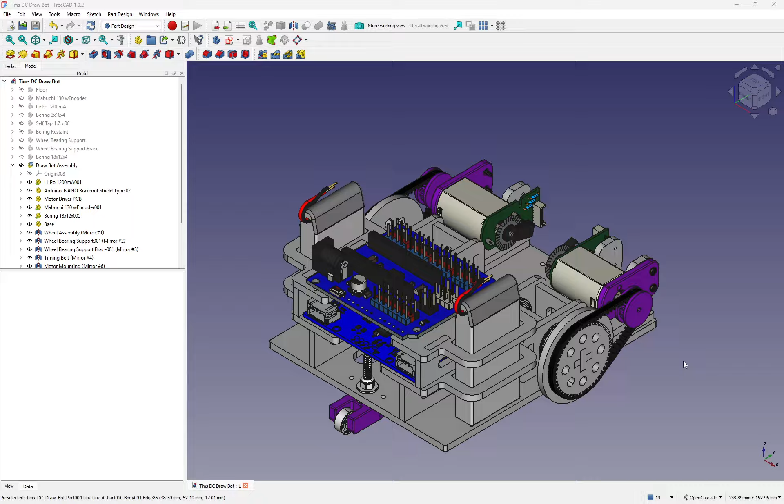Hello everyone, this is my little draw bot. I haven't drawn the pen lifter yet. I'm going to make a lifter, but I'll put some holes here ready for screwing something I'll make out of.

I'm going to sort of 3D print something to go in here to hold the pen and move it up and down. Like most my jobs, what I'll do is I'll put a few more holes in this base plate so things can be screwed to it or added later on. A few extra holes doesn't harm it.

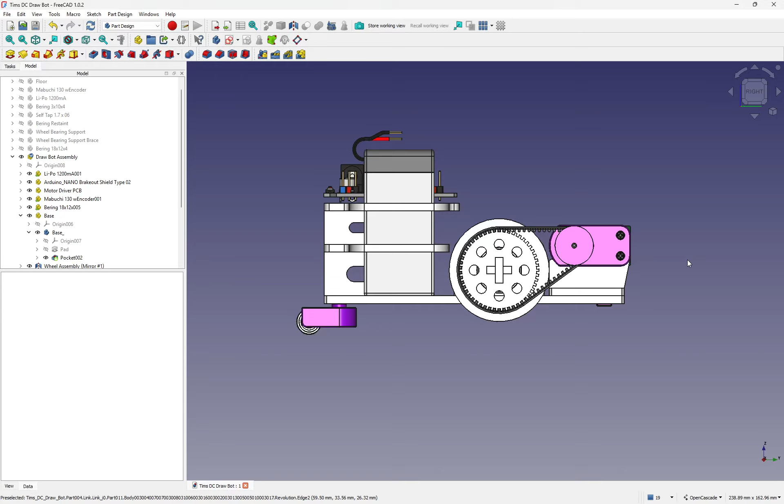Right, so I've drawn it and I'm making this video to talk about drawing a timing belt. If we look at this timing belt, we can see that it has to fit into slots on both sides evenly. Now, if both these timing drives were the same size, it's easy because you just make sure you go within 2 mil, you can go in 2 mil steps and add another one and just make sure the slot stays in and it'll be the same top and bottom.

But the thing is, I'm putting a smaller gear on here, so in real life you'd just add this and then you'd have this on a slide, which I've just done. Make it simple, I've just put a slide here which you can clamp and it'll move to wherever it fits. But the thing is, when you're drawing it, you want to be in the right ballpark so that it's going to fit. You don't have to put a real massive slider for it to clamp and make it work. So yeah, I thought I'd do that.

So now I've done this and I've made a cock up as usual. I drew my little jockey wheel last. What I'm using here is a bearing, so it swivels around the bearing, and another bearing here that it'll sit on and roll. So basically this will turn into whatever direction we're going.

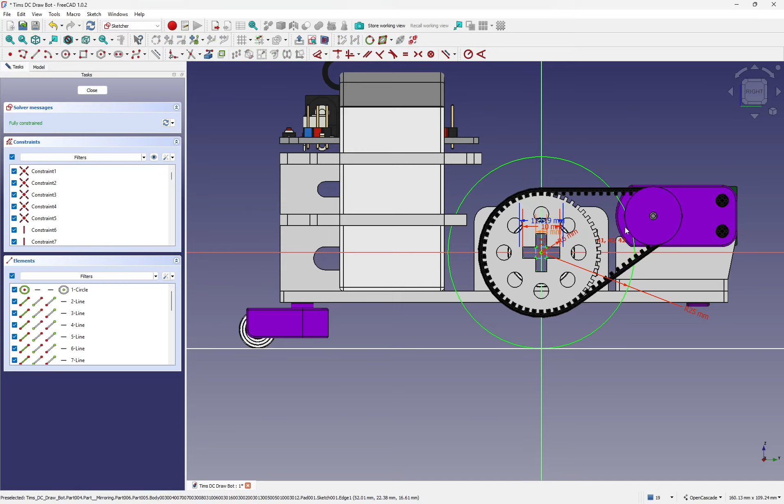So delete that, and we'll just bring that down to the floor. And so what radius have we got there? 24, well it's 25 mil, that. There we go, 25 mil. And you can see I'm clashing now with this, so I'm going to have to move all that out that way. And I'm clashing with this here now. Now, I'm not clashing with the top bit. I could leave that where it is, but I'm going to have to move this battery back.

So let's start with that then, shall we? Let's do our mods. And what I want to do is move the back. What I'll do is move them right to the back here. Let's start with this top panel. This one. Yep, this one here. So what I'm going to do is get rid of all that. Get rid of that one.

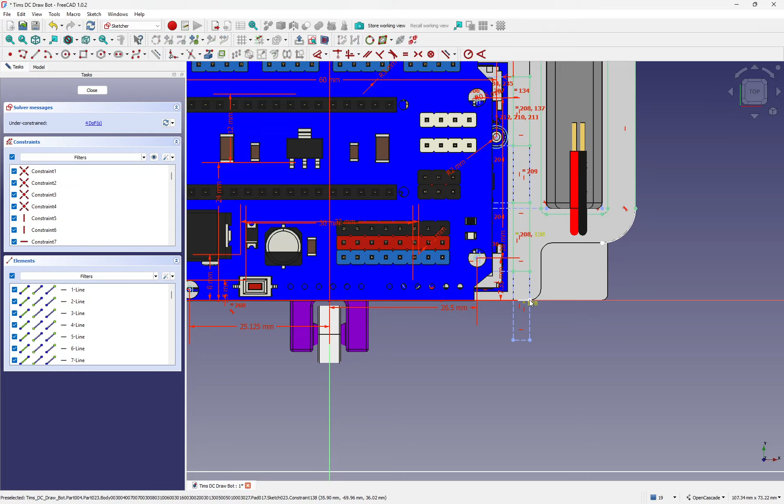Right, now notice I've got a dimension on that one, so I'm going to have to replace that sometime. So let's just bring that across. So, no, let's fix that. And I've got it fixed on there. Or is it fixed at the other side? Let's find out. Rid of those. Now is it fixed? No, so that's not fixed anymore, and I can bring that.

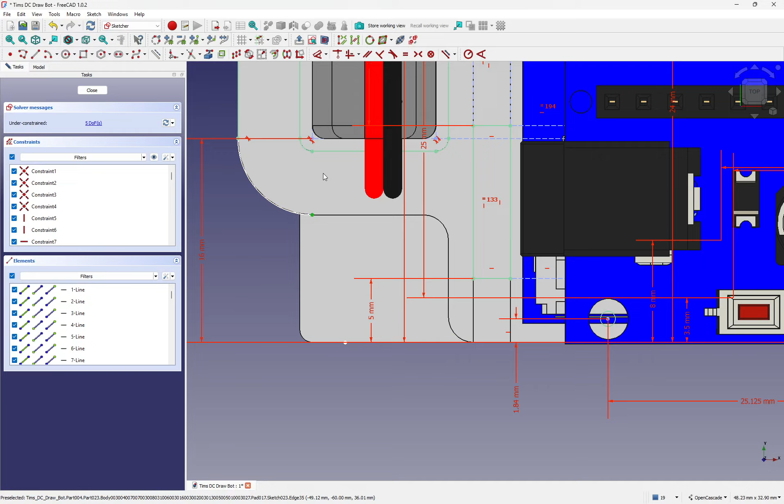What I can't do, what I need to do is release this. So this is tied in somewhere, probably by this here. So I'm just going to get rid of those as well, and get rid of those on this side as well.

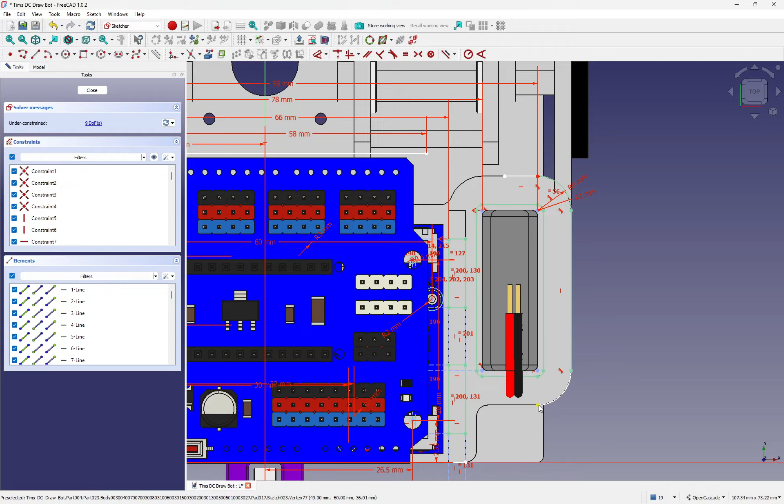And that's not tied anymore. This is tied still - yeah it is. This is tied, oh there we go. Got that there, tied it somehow. How is that going to the other side?

Anyway, let's have a look in there. Let's just make it wireframe. And what I'll do, no, I think what I'll do is we'll get rid of the actual panels. Right, so let's just get rid of the nano board for now.

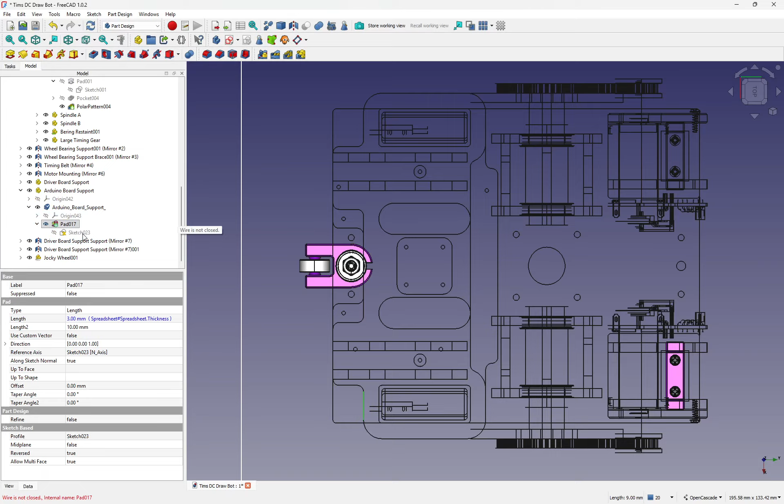Where was I? That's, yeah, that's fixed that way. So what we're going to do is going to make that. No, actually that wants to move down. I should have left some others in there, but yeah, that is going to go across.

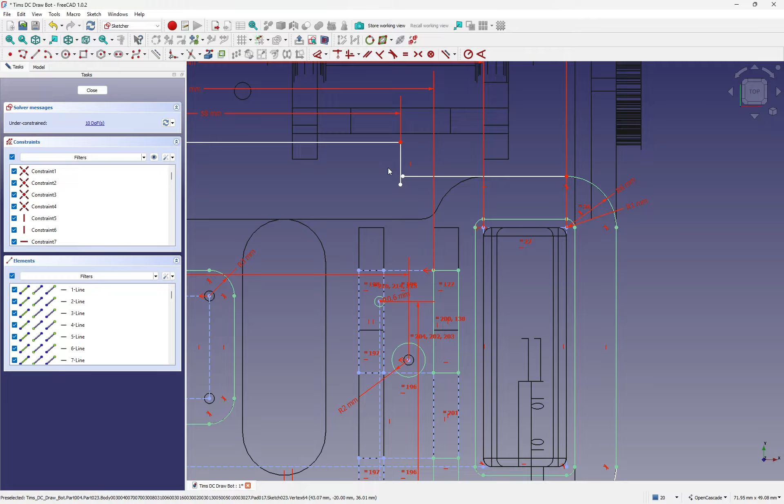Yeah, that's going to go across there. So, in fact, what was that? What did they have there? Yeah. So, leave that.

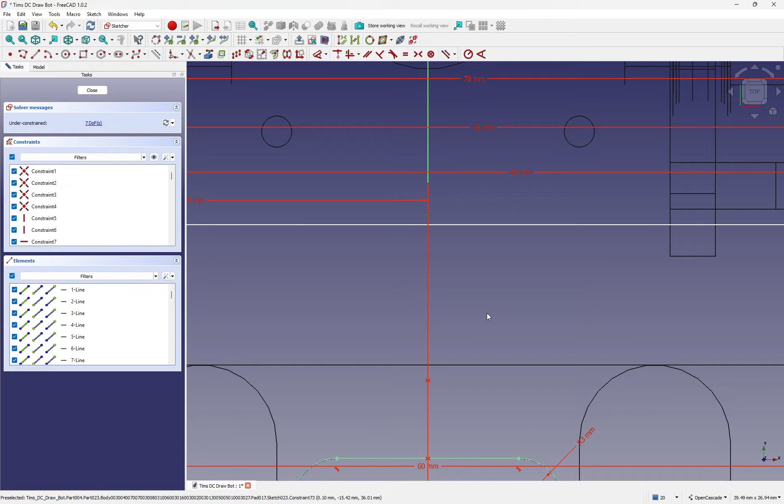There it goes. Right, what I'm going to do is I'm going to keep that central. Right, so that is fixed. What's fixing this? We've got that going across there.

That's only fixed to this. Oh, it's this one here. Look, there we go, I've got that one fixed there. So now that should actually move. It says it should move. Oh, it moves the top one. Oh, right, okay, do that.

Right, that's fixing that top there and that top there. So what I want to do is I just want to delete that one. And I want to keep that the same length. Yeah, so we'll have that there, and I'll just delete this one. So now the whole thing should just move down there like that. So that's what I'm trying to connect them two together.

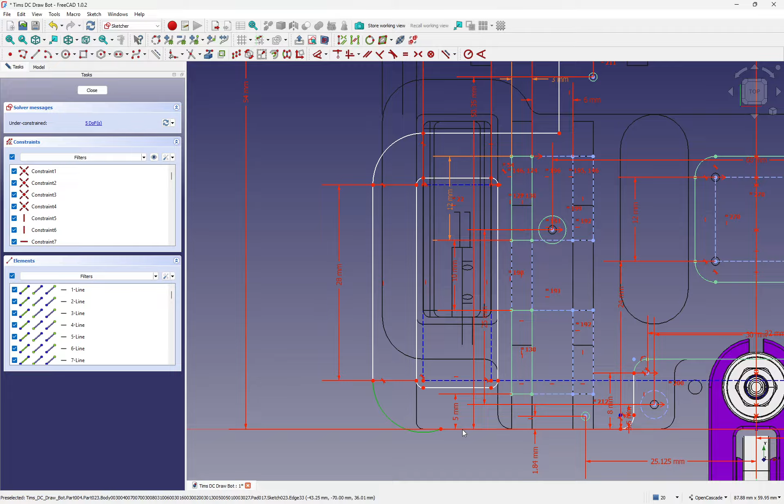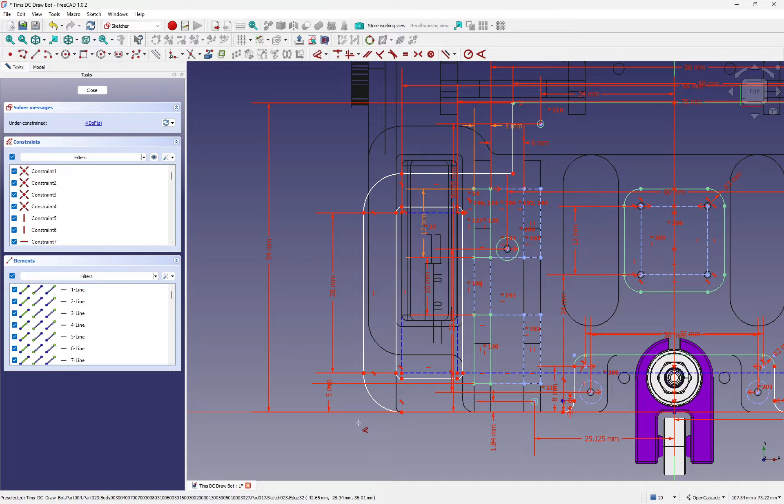Line up. See what that one is. That's that. Or is it this one here? Right, wait a minute, I wish they'd go behind the actual sketch. What else is in front of the sketch now? Oh, that one, there we go.

Oh, actually, I've done it. I thought I hadn't done it. The computer must have been a bit slow there. Right, so connect them, and let's just make them tangent.

How's that come? Oh, what's up with my computer? It's gone slow. Right, so I've moved my batteries down and we've got these down now. So for some reason these, oh right, yeah, it was this. So that, I don't know the radius. So I've got a 2 mil there. So that's, yeah, there we go. It's all fixed now. And what I'll do is I'll put some radiuses in here again.

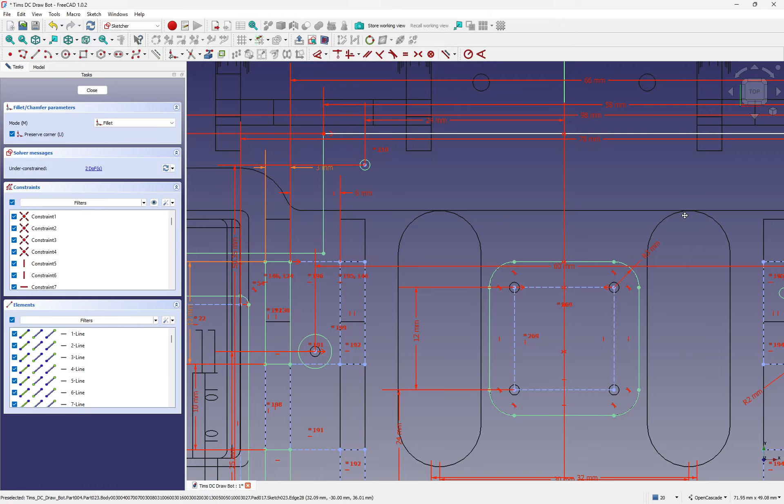I deleted something I shouldn't really need it to. So, yeah. Right, so that and that. Well, let's do it on this side. That and that equal to that one. So that's got that and that.

The thing is, oh yeah, I want to make this central. So if I go like that and that, that'll line them up eventually. We do that one. And do the same here.

There we go, we're all back together again. So that one should now, that one should look okay. And there we go, so I'll move that one back. And so we can move our batteries there now.

Where's my battery? There's my battery one. And this one. So my batteries are going to sit there now. So we need to alter this bottom one as well now.

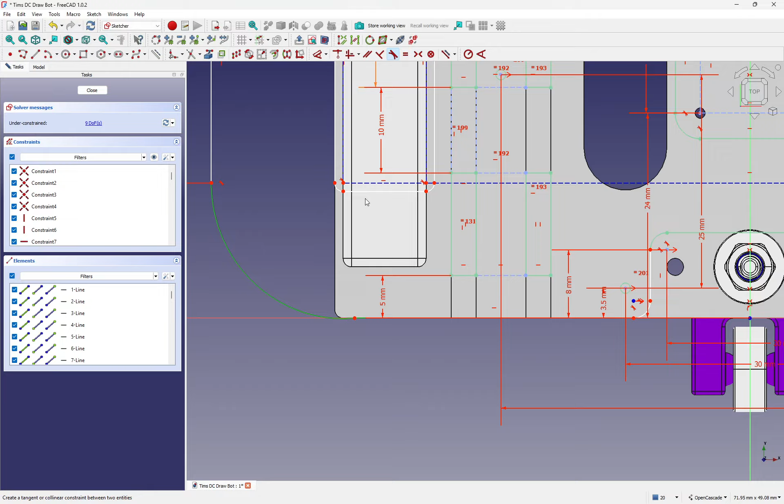Okay. And these ones. And that's going to allow me to put that one. That can bring that down to there. And just make sure that is tangent. Yeah, it's done it. Right, so why is this?

Stuck in, nothing stuck in that. Right, oh, that one's going to need moving up. Is that attached to it? It is. What have I got it attached to? That, I think. Yeah, go back up there.

Right, where's the other one? Just go wireframe again. And just zoom out a touch. Where's the other one? Actually, is it going to be above that? I don't know, we'll find out.

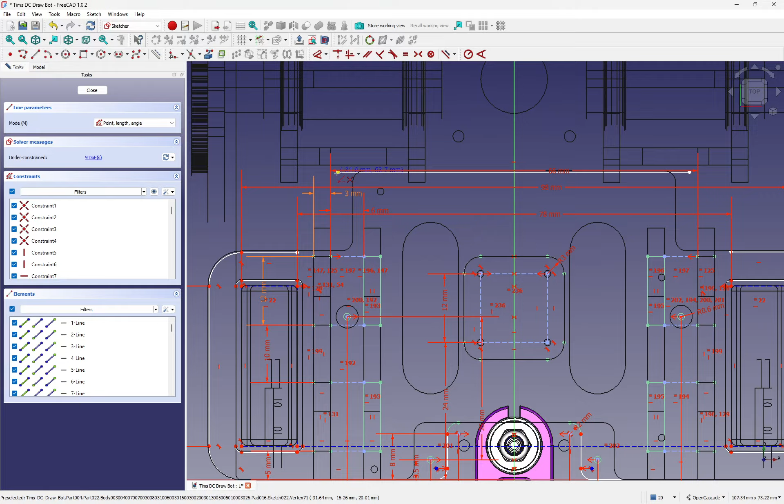Put some rounded corners in there.

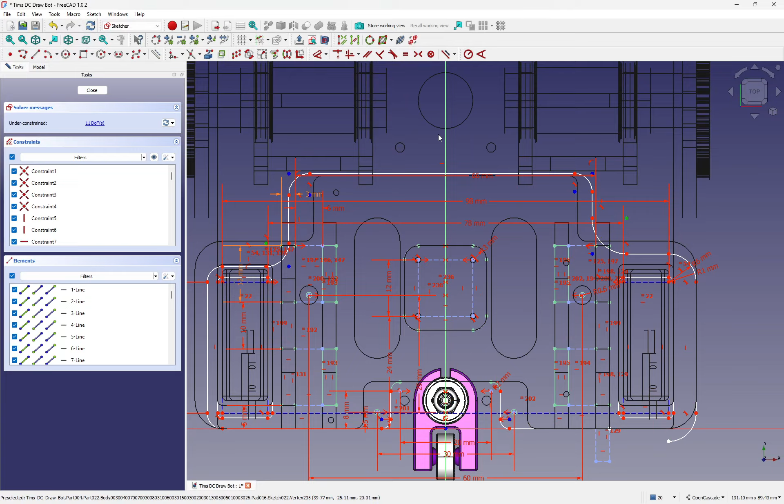Straighten those up. Centralize those. And we'll centralize. And this one is going to be same as this one.

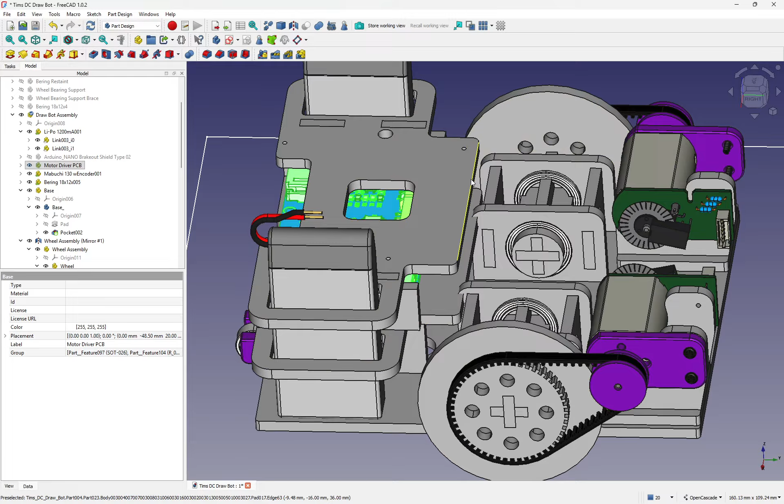So this will want shortening. In fact, actually, I need that one for the Arduino. The Arduino screws there, so that goes. But there's nothing on this, so we'll have to get that all the way back.

And now I can either shorten that. I've got too much edge. What I'll do is I'll just make that longer there on both of them. So let's just do the top one.

Yeah, yeah, I reckon I need to move it up there. So that means I need to just get rid of that. Free that up, that moves now. Yeah, that moves us back together again.

Okay, and then that one there, we will just put a... Do I need to put construction? Right, oh I know, let's see what it's at. Yeah, I need to, I'll just disintegrate.

All right, these here. Yeah, so I'll get rid of them. So what I need to do is back up and get the others back together again.

There we go, that can go up there. So what we'll do, construction line in, keep that in line with that.

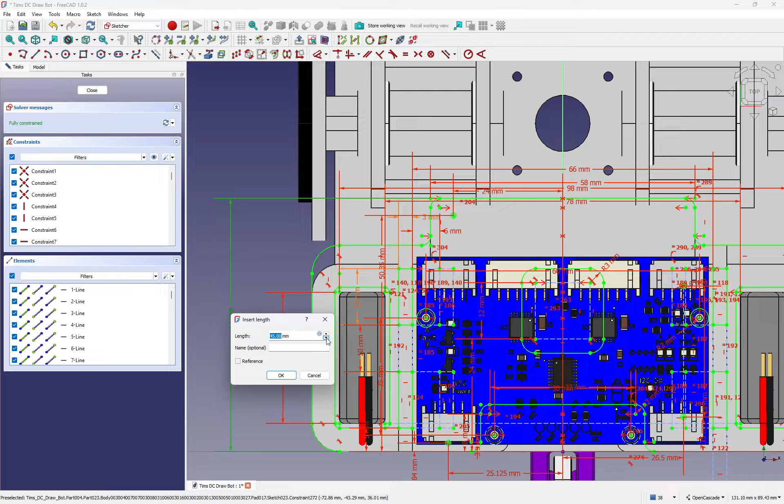Let's just reduce that by that. Can we? No, hang on, right, let's just go. Oh, what's that hole there for?

Oh, hang on, which one am I doing? I'm doing the Arduino one. Yeah, that one has to steal it. So, right, I need to do something similar at the bottom.

It's just like I like symmetry. And plus, I need this, make it too weak if I didn't. So let's do this one now.

And this one needs that one bringing back. So that's this one. Yeah, so that one should go back. Oh, let's do the others first.

Right, so one is, oh right, yeah, I know. Right, I just need to pick the right center point here. This one up. Which one is it?

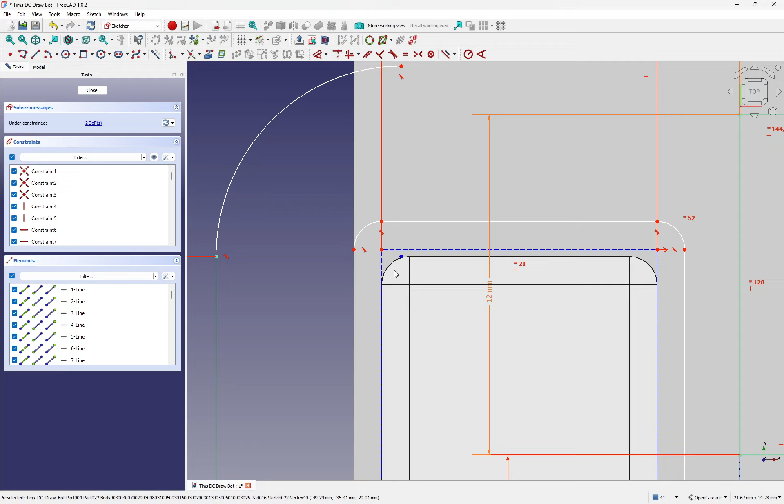Oh right, that's that one. So it's got to be this one. So what I can do is I can put them three together. And that one's free now. Can't move it because I've got this one fixed here.

Now let's find out which one that one is. Oh, it's the one at the end of there. So yep, let's put that together. And let's just do the same again here.

So that should be, yeah, that one, hopefully. Oh yeah, that moves that one up. Right, so I need that one to go to about there. So we can set that in stone.

Let's just get a dimension across from there to there. Let's make 44, won't it? Yeah, let's set that, and then we can make that vertical.

Let's set them. In fact, well, hasn't it actually? It's never set out at all. So it's not changing. Oh, it's this here.

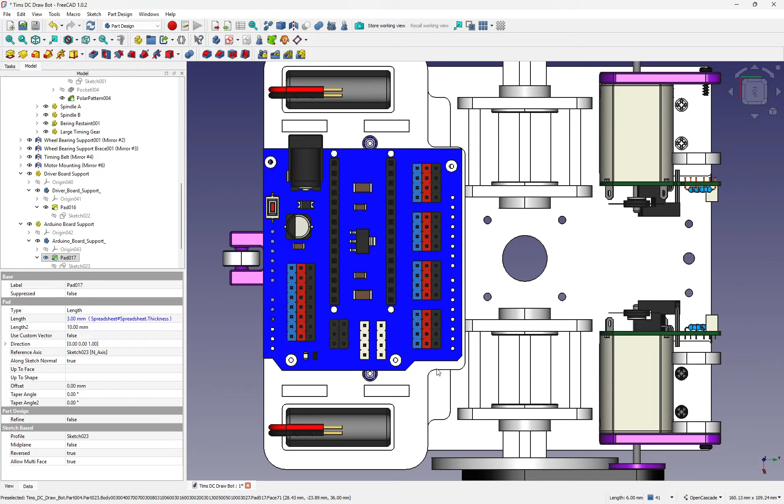I might make that a bit wider just so it's a bit... look at straight on top. Yeah, so that it would pass on this side, but we do it on there. Let's make it a bit wider. Use this one in.

Yeah, why have I got 58 now? Oh, because I'm on another one, I was measuring doing the other one. Yeah, right, see, there's 70.

Yeah, I'll make it the same as the other one. Maybe 80. Yeah. Or did I make it 90? Oh, I didn't. Must be measuring - oh, I'm measuring from here before.

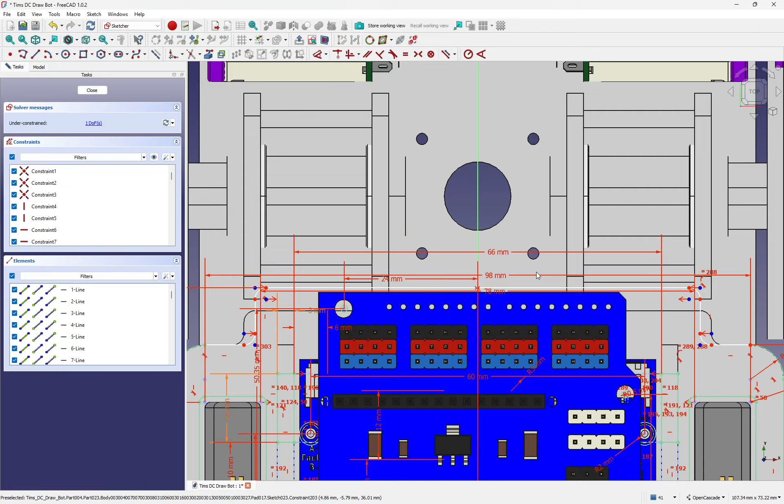Right, hang on, let's do it the same way. Measure from there. We'll put in 80. There we go.

Yeah, it's fine to me. Does that... you never know, I might want to mount some stuff on there. Maybe I put a hole in there. Anyways, that's holding them two boards.

So now what I need to do is we need to move this back. Now we're getting onto this timing belt, so let's have a look at our timing belt.

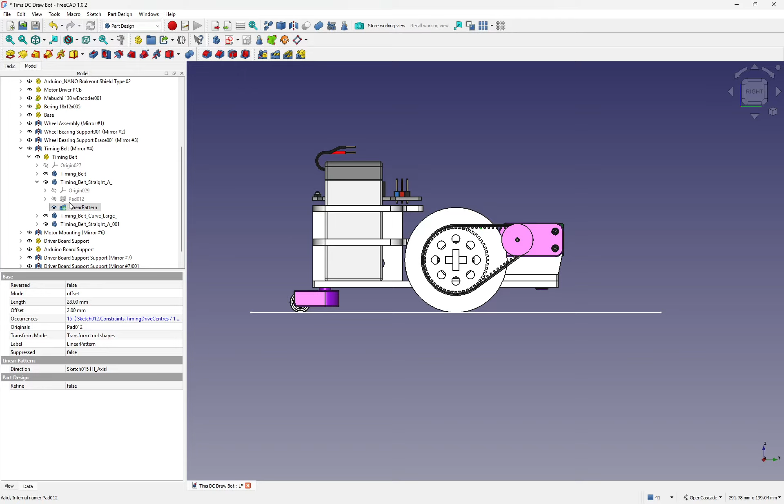So yeah, so if we look at this sketch here, I think it's this one. Yeah, that one there - oh no, it's not that one I want. Well, which one is it? Oh, time, I'll try this one. Try that sketch, there we go. We can see the sketch there.

Now, as before, I mentioned in some of the other videos it's good to use a spreadsheet, and put the spreadsheet in a separate file because sometimes it's better that way, if I'm going to start splitting up the model into separate components and use it more as an assembly. So I've actually put it in a separate file.

What's that? Yeah, I don't know what's wrong with my bloody PC.

Anyway, there's our spreadsheet. I've put in here some thickness of my tabs so that I can change the thickness of the material. I've got some new board actually, and it's more accurately 3 mil, so I'm going to have to put kerf in as well, deduct the kerf from my laser later, and then we'll check that it all fits.

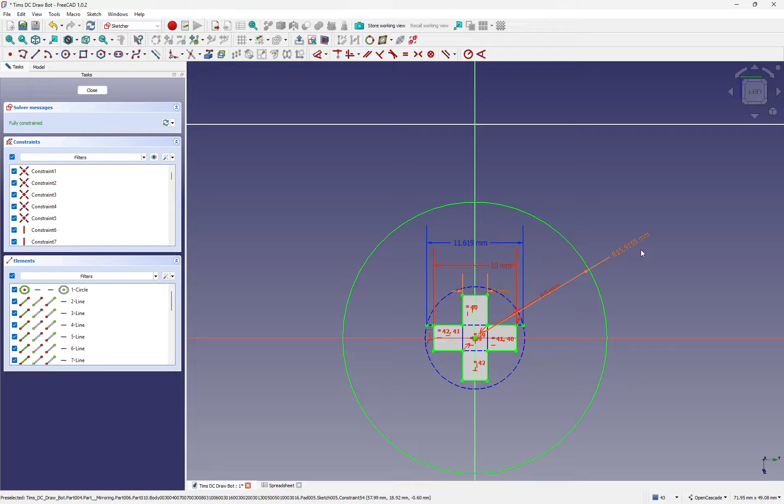So to do that, we just multiply our number of teeth by 2, divide by pi, and divide by 2 again. And that will give us a radius based on the number of teeth we want, because that's the number of teeth I've set in my spreadsheet. So we can see that, we'll go okay there. So we can see that it's not, like I say, a whole number. We've got a fraction of a number there to get all the teeth to fit.

So what happens is we close that. Just remember that's about 15.9. So if we close that and I go to my wheel here, I want to make it bigger. So at the moment in my spreadsheet, I've got 50 teeth. Well, let's give it 60. So we give it 60 teeth here on our large wheel, and let's have a look at it.

What I need to do is just go up here, fairly high in the tree. I'll probably go about here somewhere. As you can see, it's highlighting all that lot. And what I'll do is I'll just recompute. And it's got me a solid layer. Let's just go back to this sketch. That is 15.9.

Right, so now we're at 19. It should have recomputed when I asked it to recompute. But anyway, okay, so you can see that it's increased, and I've obviously done something wrong with my maths. We'll correct my maths. I think it's because it jumped too far, and I think what happened is that line there should have been over here. Let's just undo that, shall we?

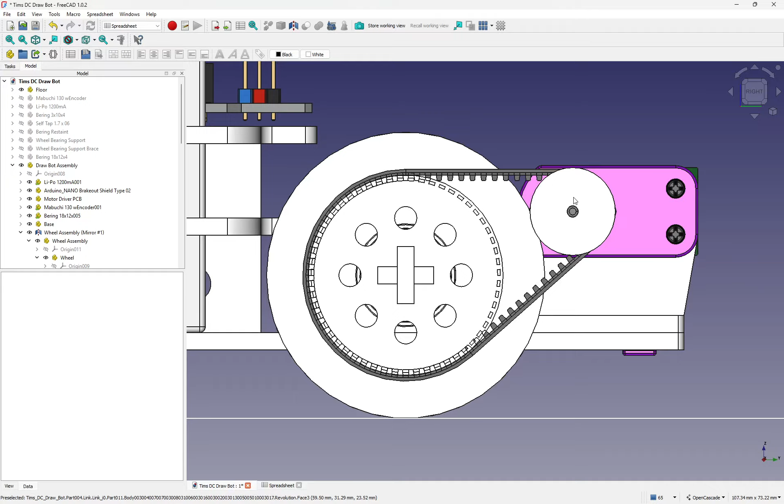This is because I'm using variables everywhere. So what I can also do is I can set this distance. If we go to belt again, that one I think it was, right, that one. You see this 30 mil here, I want to move this further out. But can you see that I've actually given it a variable name? This is timing drive centers. If I use this in my calculations for all the teeth and everything, then this is going to put everything in the right place. So at the moment, let's just turn that on. Let's turn, what else has it turned off?

Can you see where my motor is here? That's using this variable inside the timing drive centers, used to position this motor. So I want to move this out about another 10 millimeters.

Let's make that 40. Okay, that's going to go way out here. Actually, it's not that far. I reckon 35. 35 should do it.

So you can see here that I really want this here, and because I've used this variable, if I go to the motor again, there's that motor. Now if I go recompute, it's recomputed its position and put it in the right place.

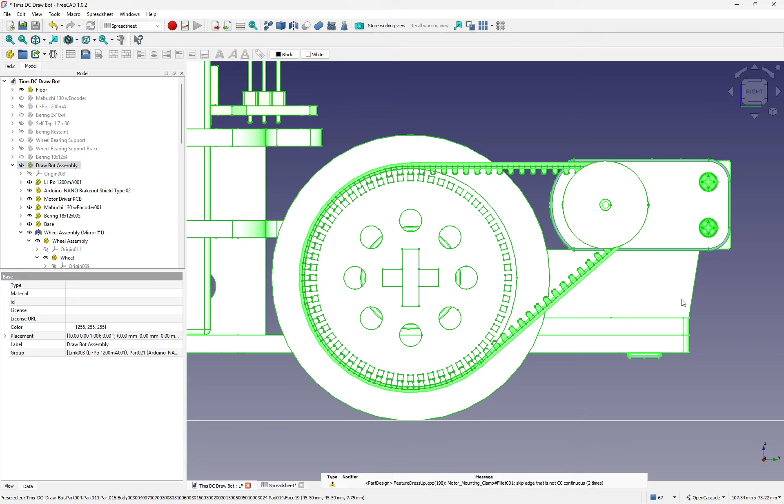I don't know if I've actually... what holds the motor, I can't remember if I've actually used those dimensions as well. Oh, it looks like it. Yeah, I've even used... oh no, I haven't. Look, I haven't used those dimensions. I haven't used the variable to set them.

What I have to do is go back to it manually. I was only concentrating on the thing. But yeah, so I reckon I can go a bit bigger than that. Let's try - the bigger the better, because the bigger these teeth are, the more geared down this drive is. So let's just try 70, shall we?

And just do a recompute. Oh yeah, that looks all right. Is that? I reckon, yeah.

But I've obviously done something amiss here. I think this here has flipped over. It should be going on the outside. So let's have a look at that, shall we? So we're at this, that's our polar pattern. So that must be our cut.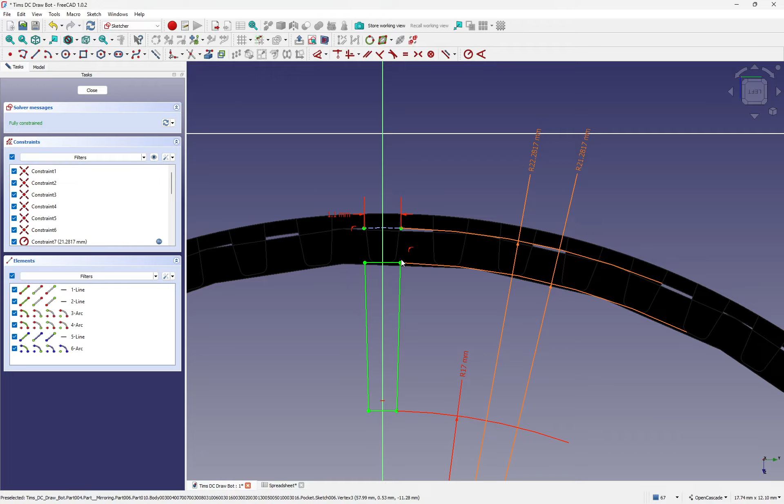Yeah, yeah, this has flipped. This one here, this R17. Oh no, I haven't put... oh, that's why. Right, can you see I've actually put values for these here?

And what I should have done is that, and put a value, one of these in here. Although, is this a line? No, it's a radius, I'm sure it is.

Right, so what we can do is take one of these, like that one, and what I'll do is change it so it adds. See this one here, it'll probably do - oh well, if I take this one here, you can see that I've used the formula here, using my sketch constraints, and I've gone a -1.

So what I'll do here is copy that, and this one - what I'll do is put that in there, but this time make this one a +1. And that puts it on the other side of this mean line there, really. Okay, so that is now going to be like that.

And now, because I've made this a variable, that should actually move properly when I scale up. So what I can do is show you that this now works - let's just change that back to 50.

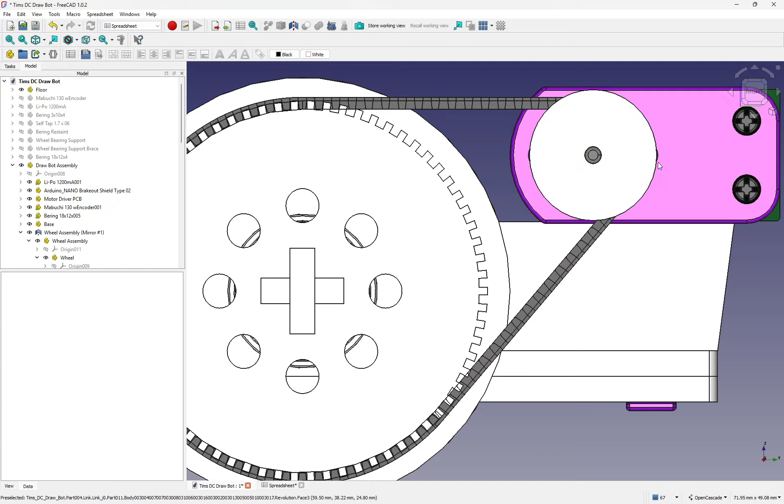Now can you see here where it comes off? This is where we've got to actually watch the position of this. Although I've increased it by 35, what I need to do is check the timing belt.

That one there, that's that one. What I need to do... oh yeah, that one will do. Right, so we can see that. See this node point here? It's dead center of that notch there.

That's good, well it's going to happen anyway because it's going to come off. And we can see that the top notch here is dead center. If I turn back on the motor, go back, you can see that the notch comes exactly in center again. So we know our timing belt is okay at 35 millimeters.

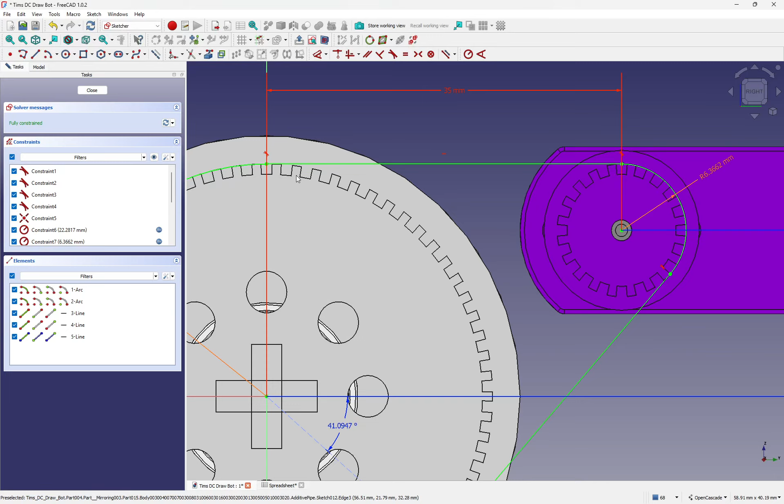I would have thought that would have to be like 2 times. So yeah, so 1, 2, 4, 6, 8. Just 2. Oh, maybe it has to be the odd one to come back here. Yeah, I don't know. Anyway, that's what we're checking for, is that our tooth on our timing belt is going to, in fact, actually, let's just check that.

I might have it wrong. Oh I want that open. Yeah, I need that turned on. Right, so go back here, turn that on, and I also want the timing belt on. The timing belt, we need that back on again. And I need that.

Is it that one? Yeah, that one there. Right, this is where I was on about. I also need that one. That on and that one. Right, turn them off.

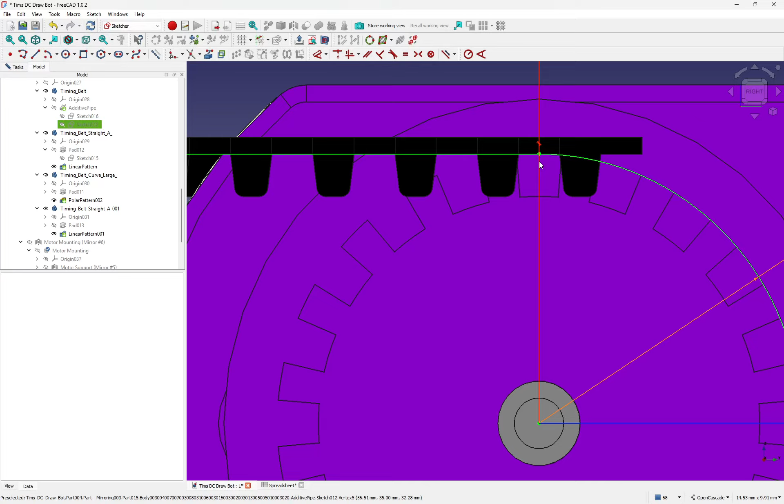Right, so now we can actually see our timing belts are not lining up. See, so that one there, although I said 35 was okay, it isn't. It needs to be a division of 2. So 2 has to be able to divide into that distance to get the timing belt to line up.

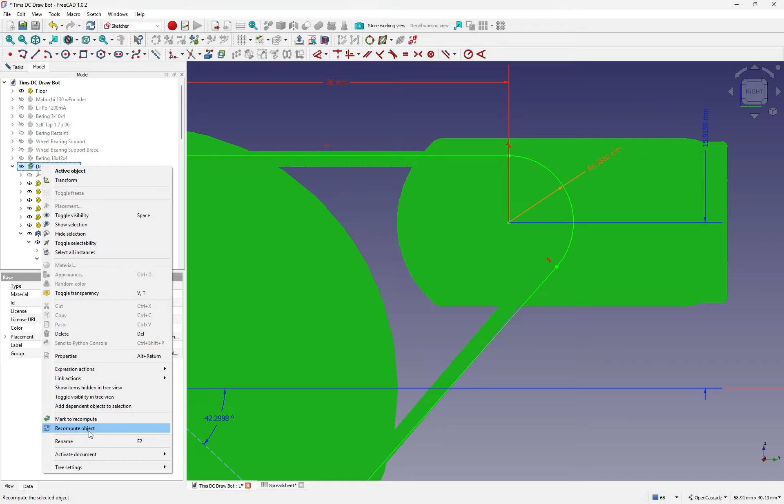So let's go 36, and add to that, and we will... there. So now you can see our timing belt is now in its correct place.

So we've gone from this point here, where it sits in there, and then it comes out, and when it comes to this drive wheel, it's now actually in a socket. The thing is, although we went to, if I've gone 35, we could have just turned this round a little bit so that this was in the middle and the thing was inside.

But I find it better just to get it somewhere close where we want it. Because can you see that this one here isn't actually lining up? And this is the reason why we need this on a skid, so we can adjust it to its natural position, because at this height, this is not going to tighten up correctly, because when it tightens up for this one here, it's not going to tighten up right for this one.

And we can't turn this to its natural position because this one here is not quite lining up. So we have to see where this node is starting, which is basically at the end of a notch. So if that's starting at the end of a notch, we want this one starting at the end of a notch too. So we want this to actually be starting about here somewhere.

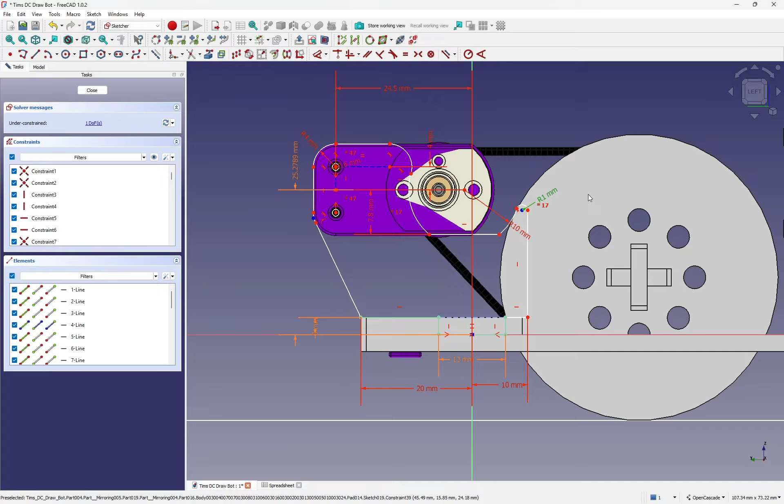What I'll do is I'll just take this off this point now, and I'll just move this if I can. Why can't I do that? All right, I see, yeah, yeah. Yep, that one. Right now then, yeah, I'll just move that like that.

But if I'd have used the actual variables instead of using these fixed dimensions, what I could do is, instead of putting that on there, I'll put it from there, because that's never going to change. That can be a fixed dimension.

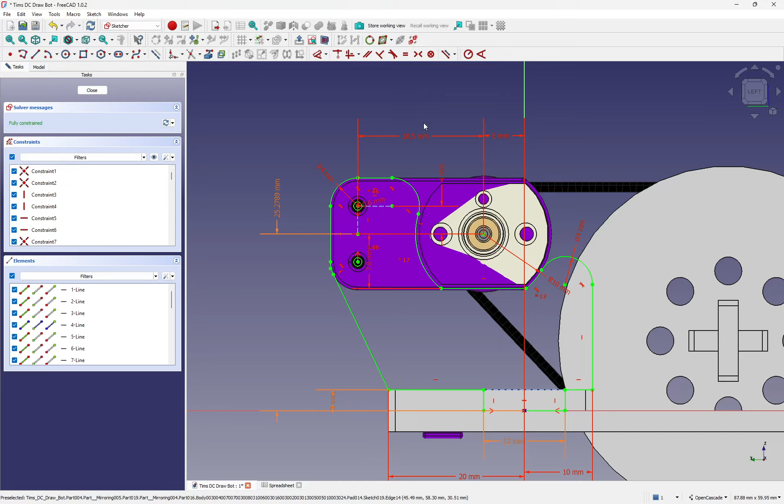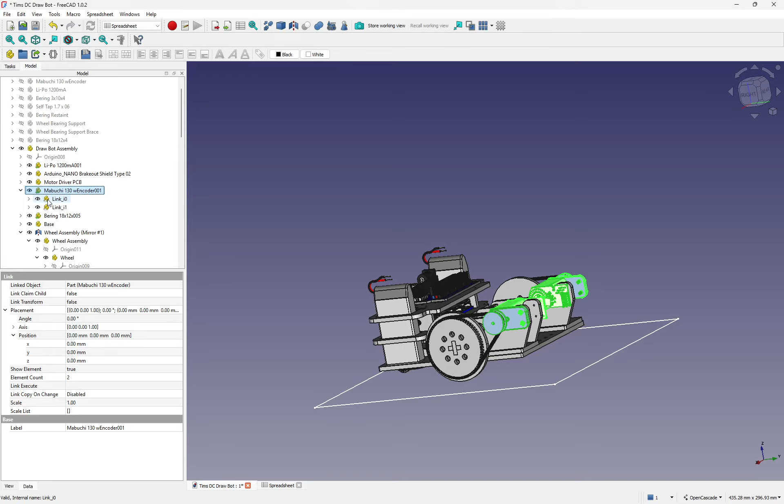I just want it to sit in there. Close that. So this one here would really want to be the same as the position of this motor. So if we go and look at our motor assembly, that one there, and we look at its position, it's not that one, this one. At its position, we can see that in the X direction, well actually it's the Y. Now then, this is because it's been, what's the word?

So I think it's the Y one I want. If I go Y, let's have a look at that. That's 36. And if we go to this one, I set that. Right, so yeah, 30 mil. Is it going 6 mil there? Yeah, it is.

So this would be, what we can do is, I know that I've set the actual object by... oh, is this making it complicated? Right, okay, so we've got this one here. And it's actually -6, -30.

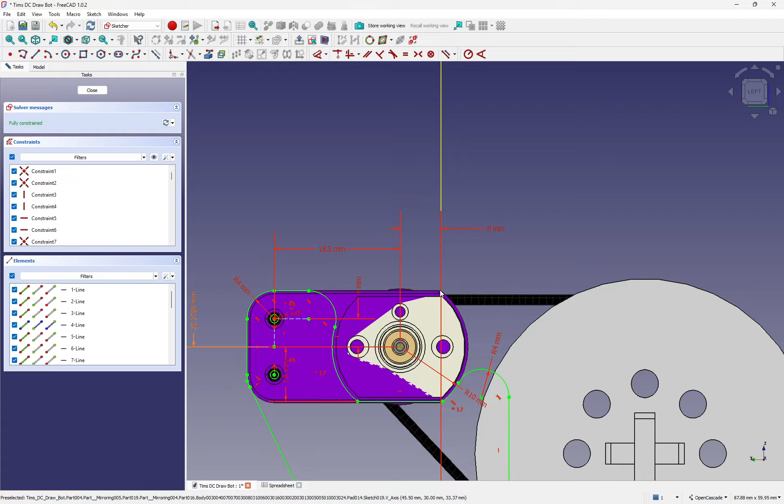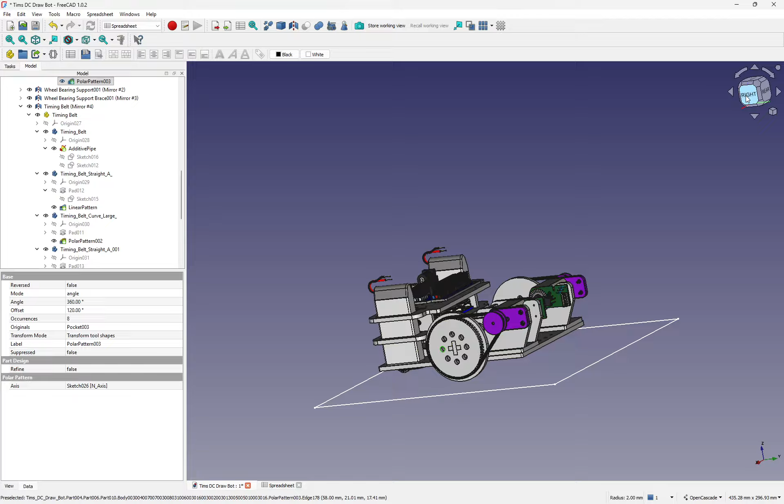What I could do is where we've gone into here, where is it? This one here. You see, we've moved this position 30 mil, so it would be plus the 6. Well, actually it wouldn't, it would be the 30 mil. Anyway, forget it. I've got to knock one off the other, and that's why I think I didn't do it before. I do it manually. Manual works.

Right, so that'll do, it'll be fine. So what I'm going to do is have a go. Oh actually, no, these holes here. Right, so before I couldn't put big holes in there, but now what we can do is I can actually...

Let's close all this up so I can see what we're looking at. This one, right, that one there. Polar pattern, so I'm guessing it's this one.

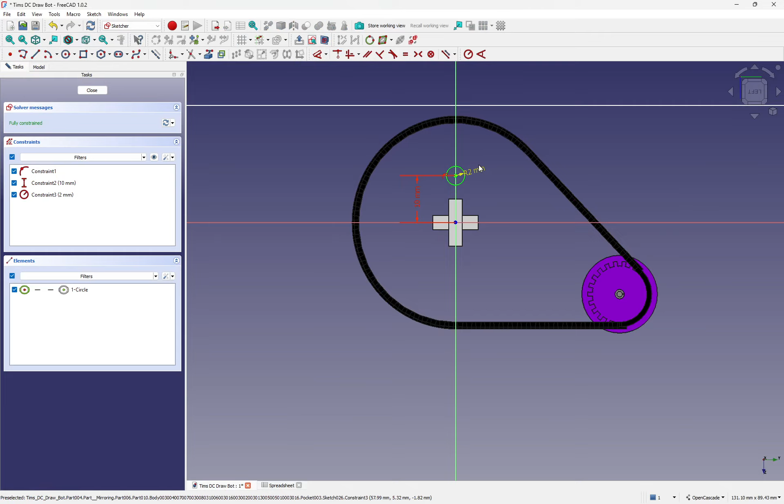Yeah, that will. So now we can maybe try 15, 12, that 4, 14, 5. Yeah, that looks good. Let's see what that looks like. Yeah, that doesn't look too bad, does it? Oh yeah, it looks shit.

Actually, what I want to do is reduce the number. Let's go to our polar pattern, and I've got 8. Let's go 7, 6. 6 will do.

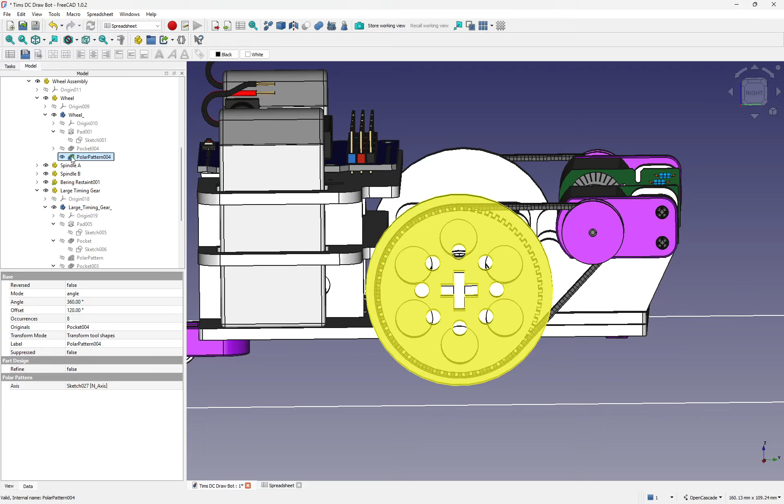And I want to do the same for the inner one. So that'll be, yeah, around the right one. So that'll be 6, not 10, 6. And this one.

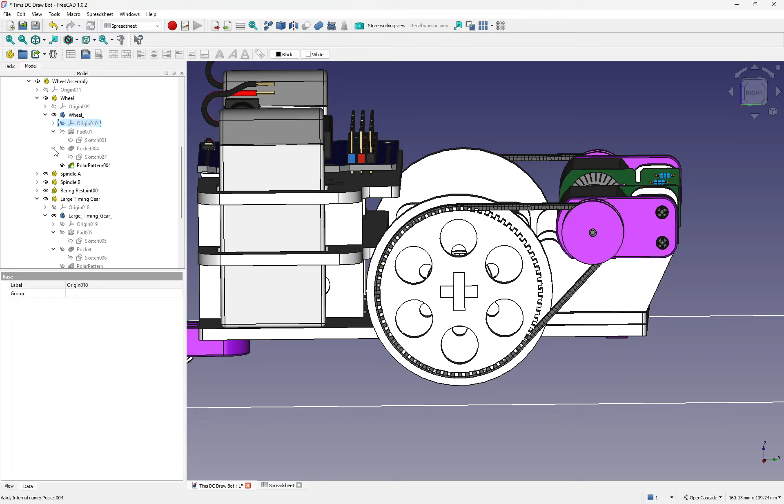Oh, that one. Polar pattern, polar pattern. Oh, it's that one there. What did I say this was? 14? Yeah, it looks right. And I made this 5, didn't I? Yeah.

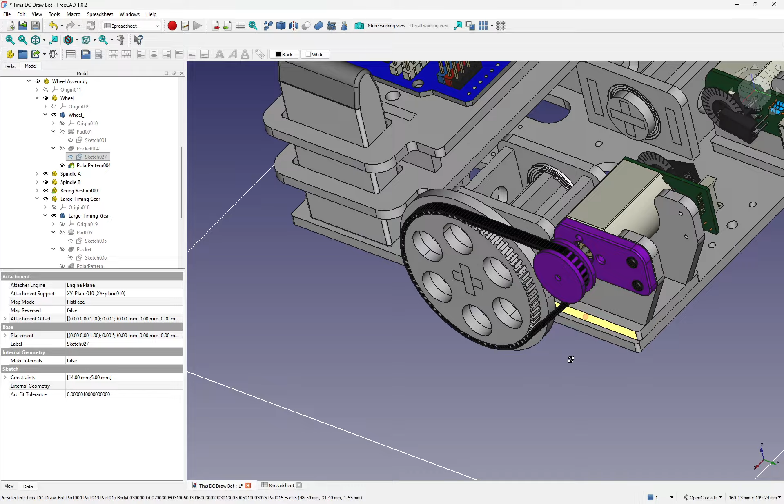There we go. Right, so we've got some nice wheels there. And we've got our... why isn't that drawing all the way around? Oh, I did understand that drawing, I just didn't draw it, did I?

Okay then, right. Yeah, well, I hope somebody was able to pluck some useful tips out of there. But I think I've done that.

What I'm going to do now is just add a few more holes in here, and I'll cut all the bits out. I'll measure and set. Next thing is to set the curve for cutting these slots in here.

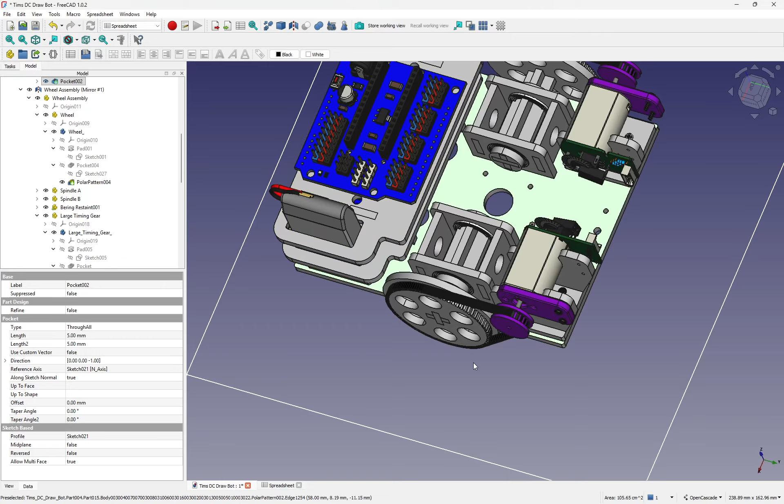So the thickness is going to change. I find it easy to just change the thickness, and things work out all right. Basically, I could alter the curve when I actually export it to DXF.

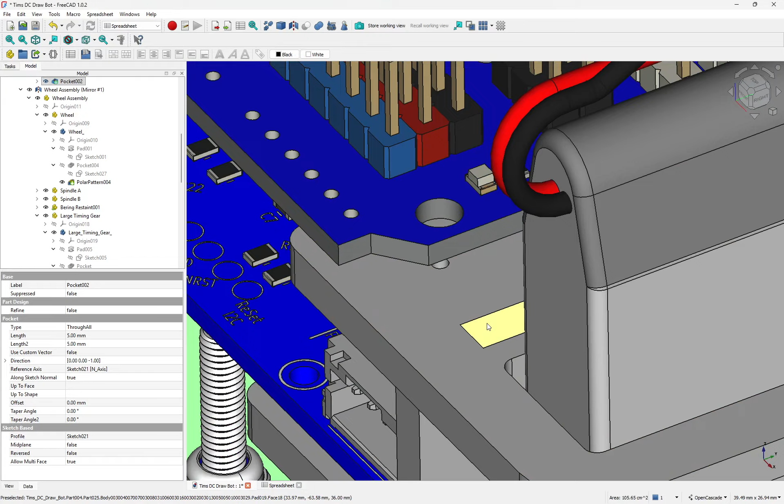But well, I'm in two minds. What it is, I want these to be a perfect fit. I don't want them to be a slack fit inside there. I want that to be a really good snug fit.

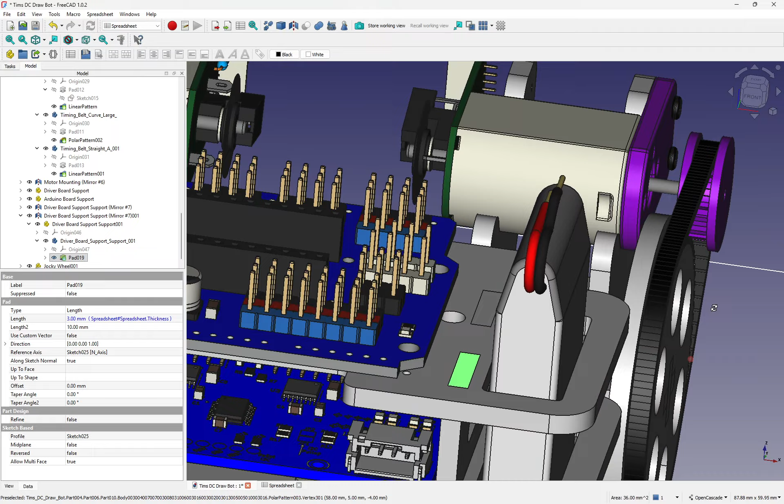So basically, you push them together and they'll hold together with no glue. But the way I take 3mm, normally the tolerance is good enough for my cut, but that's been with the other material. I found that with the other material, and this material I've got it smooth on both sides. That means I need to do it a bit more accurate.

I think the kerf on my cutter is, yeah, 0.32. So I need to knock off 0.32, number 6. What I can do is here. So 3 minus 0.32.

Oh, all right, maybe I need to write that down. Where's my calculator? Three minus 0.32. 2.68. I think I might do a test with that.

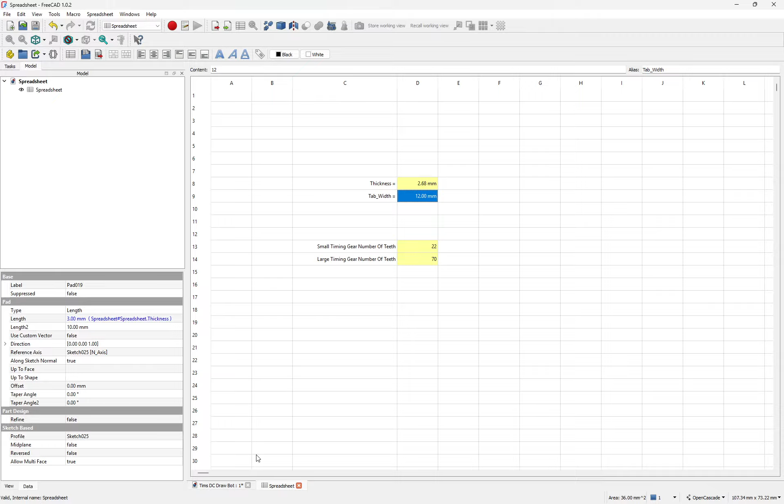Anyway, that should have altered my thickness. I shall compensate for the... oh yeah, go on then. Let's do a recompute, shall we, just to make sure.

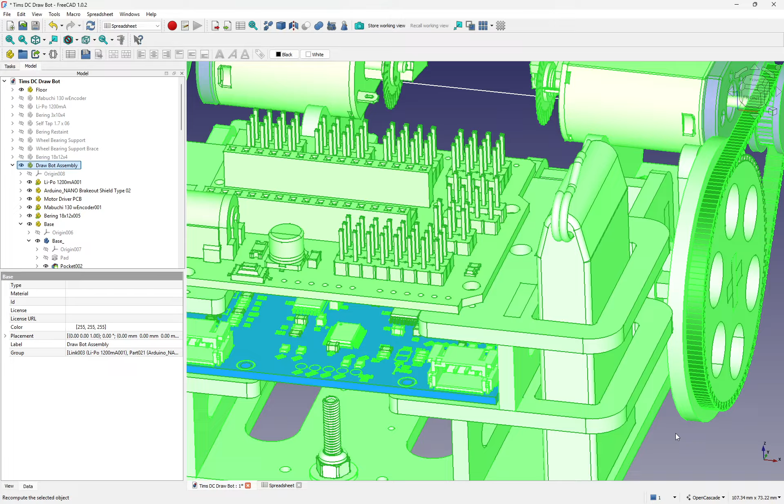No, but it used to do this automatically when you do this, but things are changing. Oh, there we go, I noticed things change. Yeah, as you can see here, it's changed there.

So what I might do, might actually, because of the timing belt, yeah, I think I might leave it at 3 mil and then alter the kerf in the actual cutting pieces. Yeah, I'm going to do that. I'm going to change that back to 3 mil.

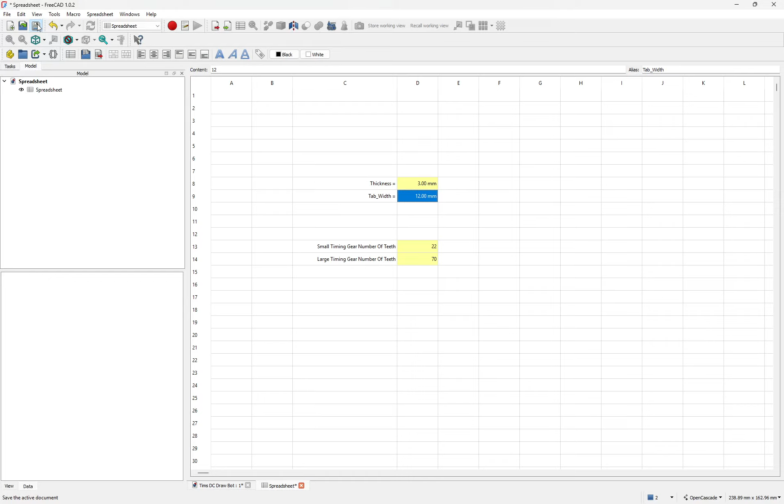Yeah, just swings and roundabouts. Swings and roundabouts.

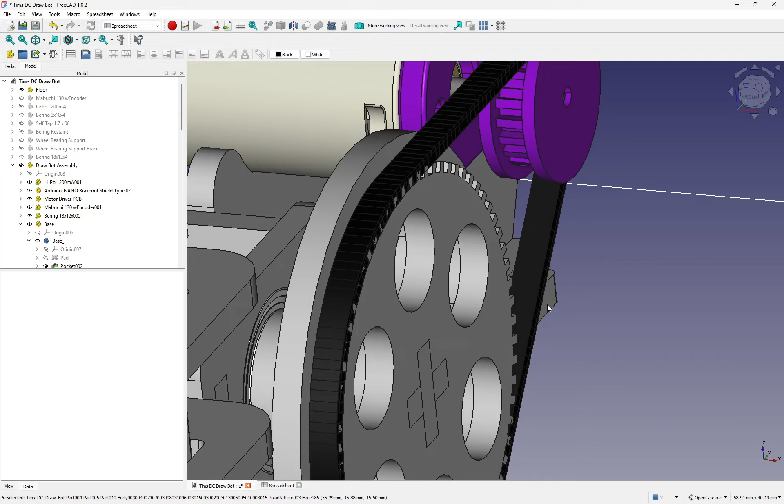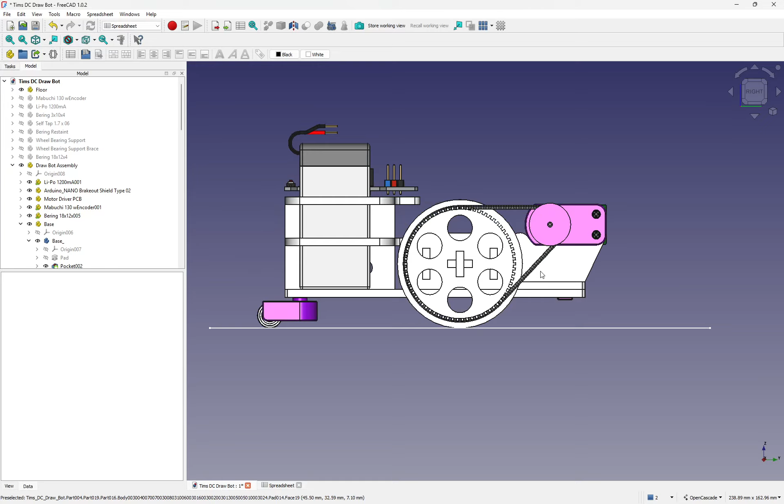If you look at this wheel here, you can see it pop out - that's because I made it thicker, and things are lining up right here now. I'm going to sort my kerf out once I've created the DXF files. What I found is creating a DXF file - let's just create one. We can turn our floor off now because if we look at our floor, we're sitting nicely. I could have made this a bit longer, but I think I'll leave it to overlap like that. It doesn't look too bad.

Yeah, it's got a style to it. Right, so let's get rid of the floor.

Like I say, the mirror image - see these two here, these two are mirror imaged, and then when I mirror image a mirror image, it doesn't quite work out. It ends up missing one. It only mirrors one of them for some reason. If any FreeCAD devs are watching, ever see this? It's an issue.

Anyways, so the way I create a DXF file is we'll start with the floor. Now they've done a new DXF, right? So let's just have a look at the options - preferences, and we'll look at the export, import, export, and we'll go to DXF.

So we've got our settings here, and we could use a legacy Python exporter or not, or the one built in. Now I'm using the one built in because the legacy exporter does not do things like this - see these holes here? I did one of these hole patterns and exporting a DXF in the old legacy, it doesn't do polar patterns. It misses them polar patterns out.

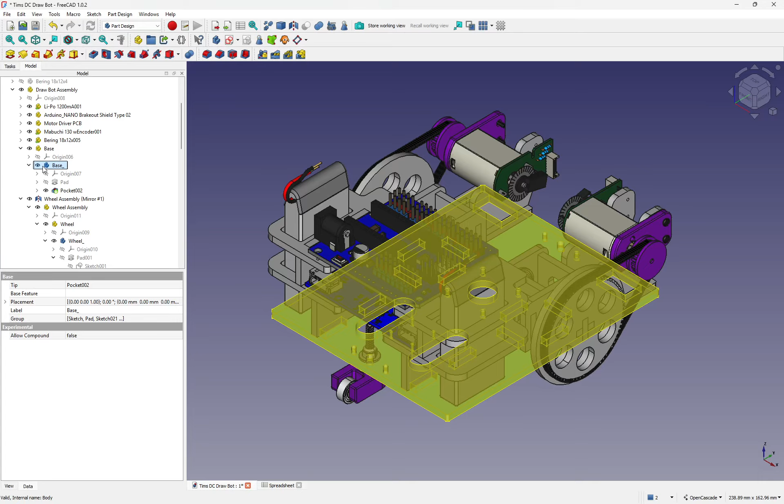Because there is an issue - at one time we could choose this and export this as a DXF. Can't do that in the legacy one. What you have to do is you have to actually pick sketches, you have to actually select the sketch.

So when you actually select it - oh, let's go to this wheel here - when you're actually selecting the sketch, you can see we're missing off the polar pattern, so it won't do the polar pattern. You used to be able to just select this and it would do everything in here and lay it as one flat plane. But it doesn't do that now - it comes up with an error because it tries to do like a 3D thing.

So I'm not using the legacy, and now with the non-legacy, we can click this and do a DXF file. Right, so let's just do that basically - let's do that wheel, the timing wheel. Go export, we're in the DC, let's create a new folder - DXF.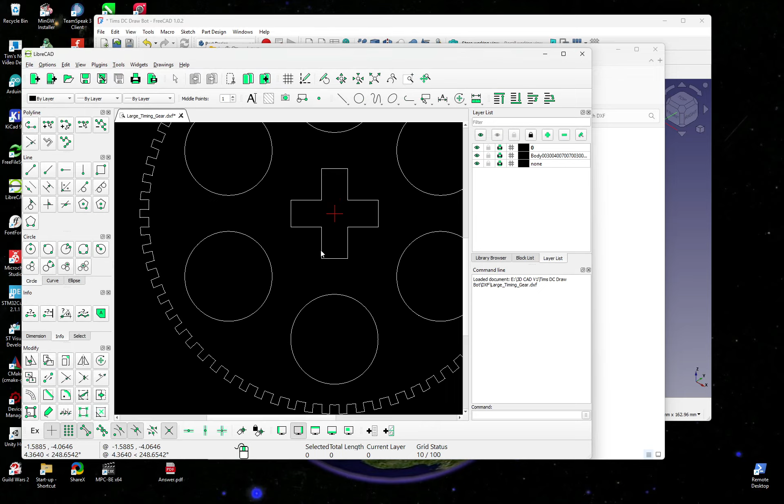Right, so that has done the rotation, the polar rotation. But the thing is, if I select it, can you see there's actually two? There's the top one for the top layer and there's the bottom one for the bottom layer. I just want one layer - I just want a 2D DXF.

So if you notice when we went to export this, down here we've got the choices of what we want to do, and it says Autodesk DXF 2D. It says 2D, and that's what it should be, 2D, but it isn't. If we use this app I use, LibreCAD, it only does 2D, but you can see that there is actually another layer underneath. This is the body - it's done the body and it's done two layers.

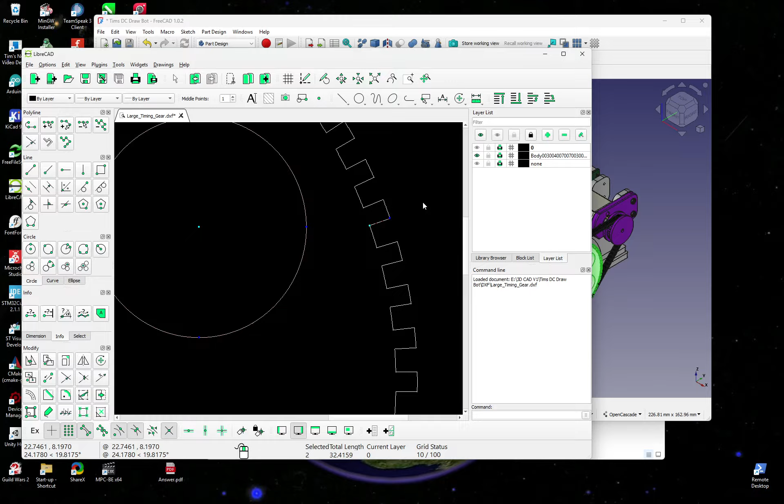So if I select - just escape on that - if I select one, I can delete that and it still leaves another one. Same goes for this, can you see? There's another one underneath, we've got two layers. And I have trouble separating them. So what I do is when I actually come to do something like the wheel here, this one, I'll leave it in the normal.

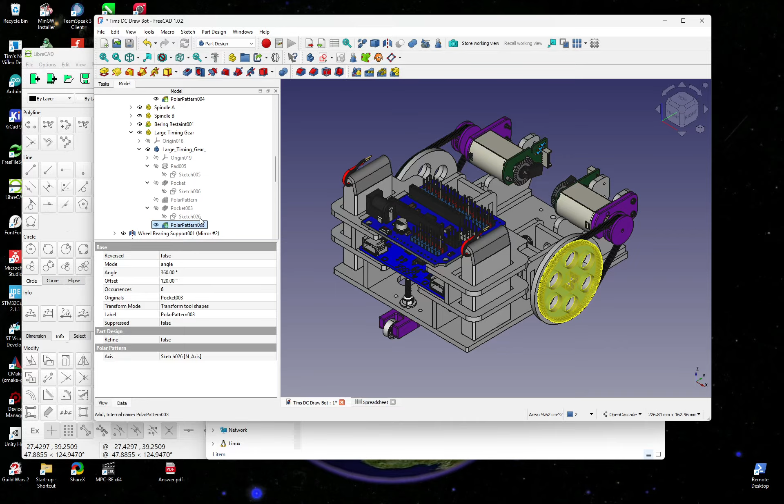I actually don't know. If it's got a polar in there, I'll do it the way I've just done it. But if there's no polar in there, what I would do is just select the sketches, but the thing is it's going to miss these two polars out.

So if we export it again, and we have another look at it, bring it in, you can see that it's missed out the polar, and it's actually drawn the sketch itself.

So what I would have to do is select this and do my own polar. So then I would just copy that, go back in the same place, and we do multiple. We'll do what they say, 70 - well actually with this, it's 69, a total of 70. We've already got one, we want to do another 69.

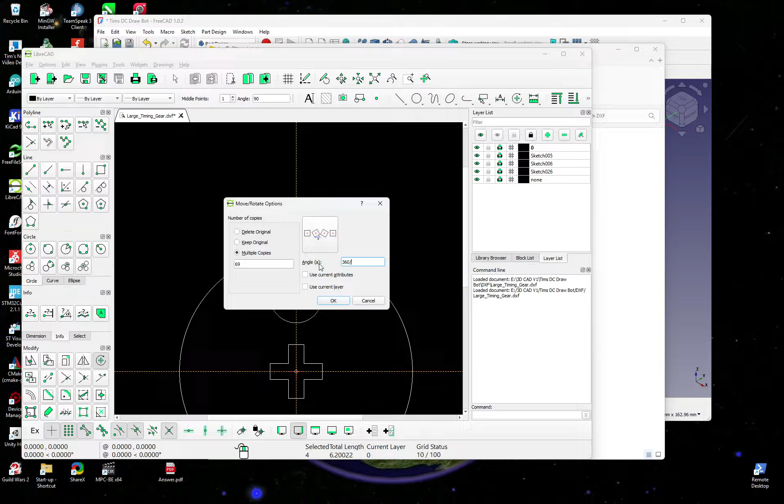And it's 360 divided by 70, okay. And that's what I'd have to do. And then I'd have to edit and cut all them. But there's a trick actually here.

So instead of editing all of them, what I would do is edit one. So this line, I just want this bit, and what I would do is cut that, cut it there, delete that. This line here - oh actually undo that.

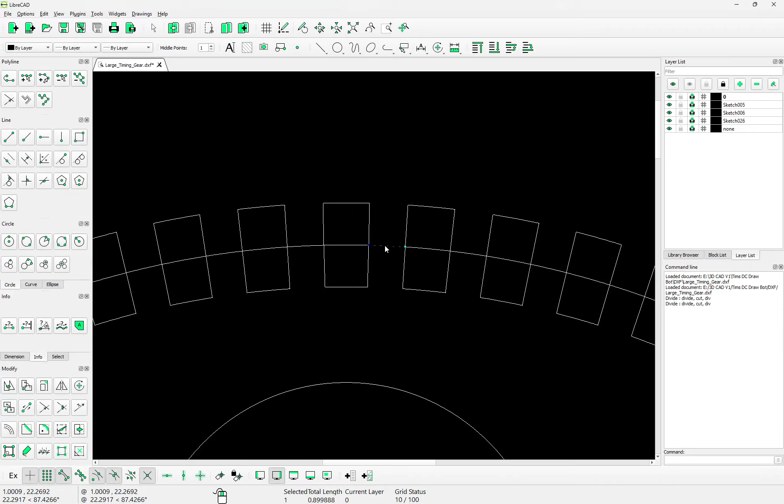Before I delete it, what I would do is let's do it the same on both sides. Doesn't matter, so now I'll cut this line here as well, and I'll cut this line here. And yeah, that's it really. Then what I would do is delete that line, delete that, delete that, and delete that. And what I've got is that bit there.

So all these, let's get rid of them - well, I wouldn't do them in the first place, right? So what we'd do is...

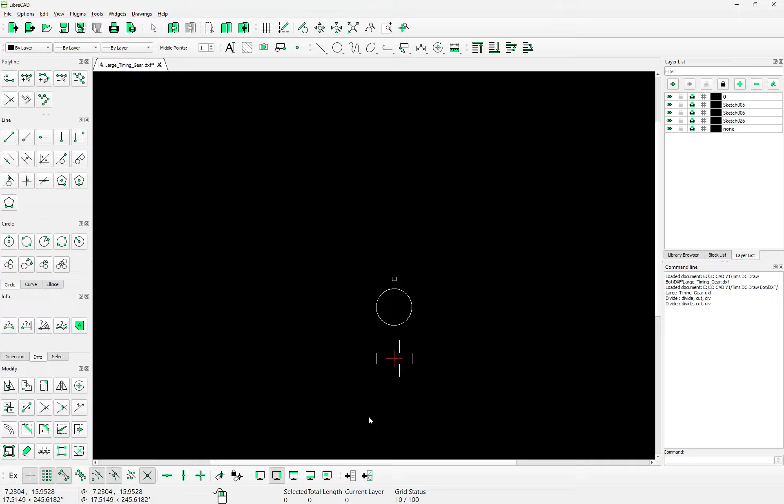Instead of what I did before, I would select them and then do the rotate center. I've deleted the middle bits. And do okay, and then - oh, what the fuck, I've done something wrong there, didn't I? Anyway, what did I do? I wasn't paying attention, was I? Right, so I got them.

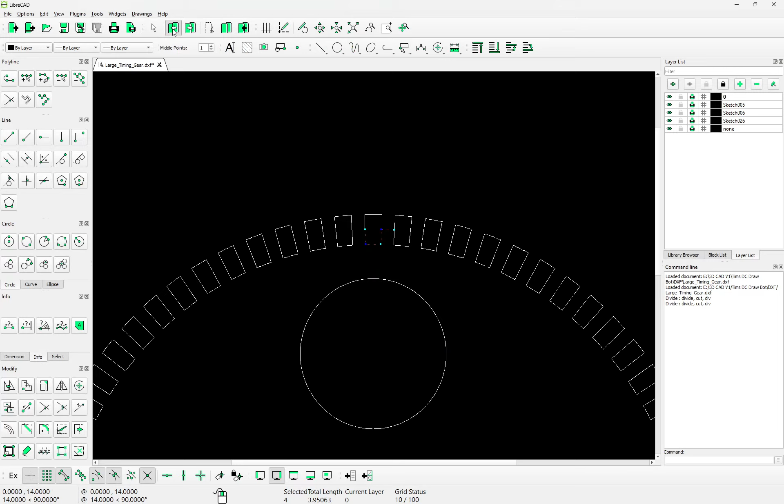Have I moved that? Right, so rotate center, center, 69 - hang on, what have I done here? Let me just back up a touch. Oh, that's the frigging hole there. There's the center. Oh god damn. Oh dear.

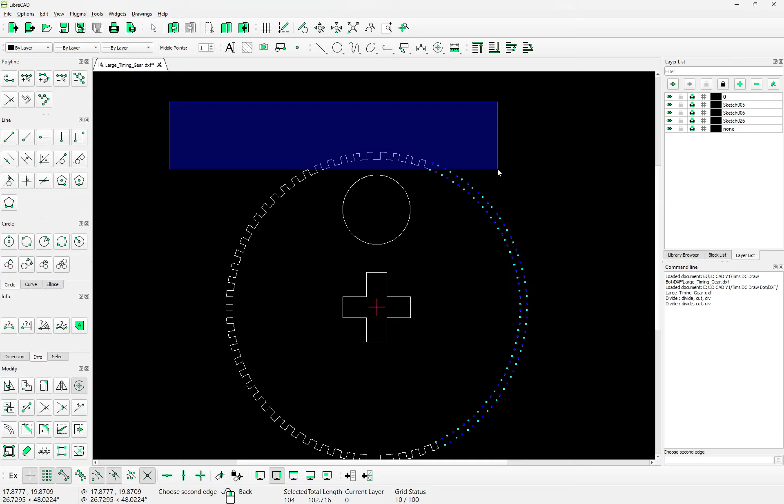Right, pick this center this time. Right, so yeah, so there's my center. I'd do it again, so that now I've ended up with them, and all I have to do is just select them all. Might as well, and then just make them into a polyline. So now that's a polyline. Yeah, so that's what I do, and then I'd just do the same with this basically.

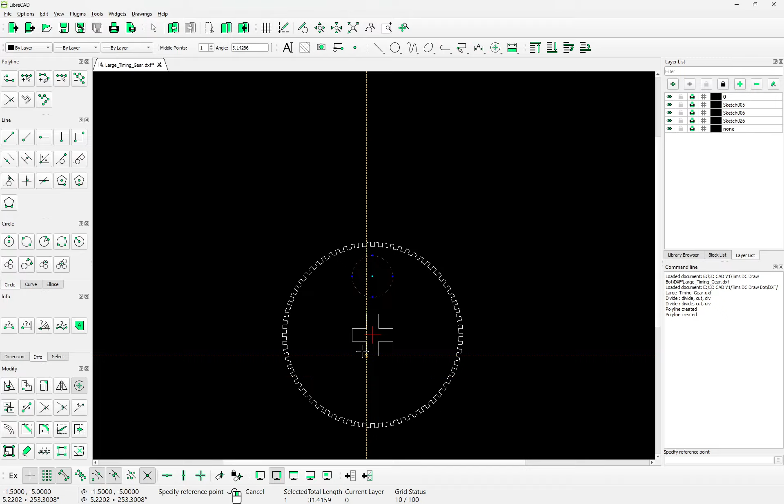What did I do, 6 of them didn't I? So it's just that, and then we'll just do 5 more to make 6, and 360 - oops, what am I doing here - 360 divided by 6, yeah, there we go. And that's it really, that's what I'll have to do. In fact, yeah, we'll stick with that.

Right, that's the preferred method actually, because the other way I'm trying to find out which ones we've done and which ones we haven't. Yeah, there's lines underneath the other one and it's just a pain in the ass. So it's not hard to draw all that in there.

So yeah, that's what I'm going to do. I'm going to just add a few extra holes in this plane, and then I will create my DXF files, and I will cut them out. So yeah, like I say, I hope someone's maybe picked some bones out of what I've just done there, and something made sense about this timing belt.

A timing belt has teeth in it, and they're 2 mil apart. So basically the teeth have to line up on both wheels to make a neat match. Otherwise you're going to have the belt slack on one side, and you're not going to be able to tighten it up.

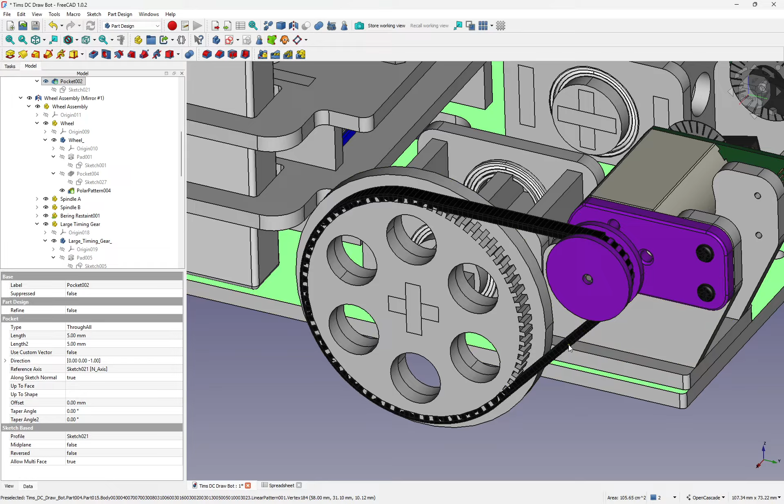Well, you can get away with it on a skid here. What I've done is I've put a clamp there, and what I can do is move it back and forth, tighten it up, and it'll find its own centre. But you need to get it somewhere close to start with, otherwise you're going to be a mile out - it can be at least 2 millimeters out of where you need to be.

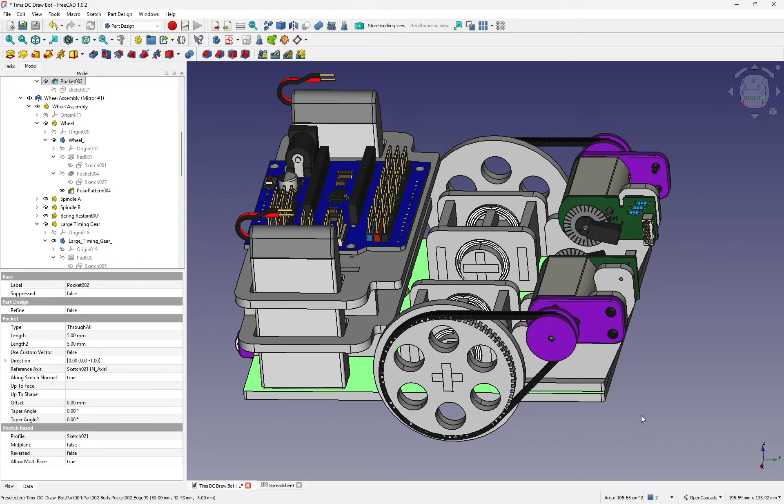Anyway, I'm waffling again, aren't I guys? I just - you found something interesting. Right, I'm going to leave it at that.